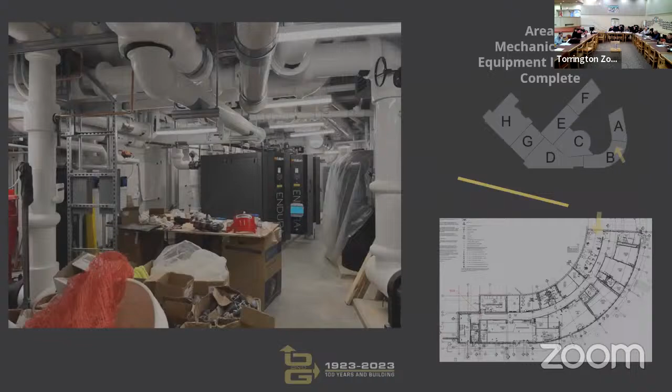Lower level. So work going on in the lower level now is the overhead electrical work. We have a little bit of mechanical that can get started in there, but primarily we have electricians doing the raceway work associated with the distribution of power, and that's going to be going on for another week or so, in the tech ed space.

In area B, fixtures are finished, paint's finished, door hardware is complete, with the exception of some sound gasketing, which we're working with the manufacturer on some tolerance discrepancies. They're basically finding a narrow gauge gasket that meets the specification requirements.

At the former loading zone areas, this work is now nearly complete. We're still waiting on a couple of components above the ceiling, but the space is clean. First floor flooring and corridor is finished. Final cleaning is now finished also on the first floor.

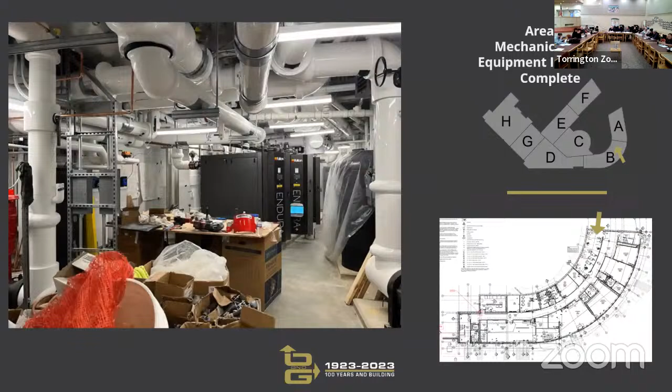Punch list has been generated. We've been really focusing on punch lists in building B and building A over the last month. We're at a point now where we're going to start that process with SLAM in a back check mode.

In area A, I mentioned a couple things. We had to finish on the exterior of the building. The sunshades are finished, exterior doors are now finished.

Above ceiling work is finished, door hardware is finished, carpet's finished, flooring's finished. We're final cleaned and generating the punch list for the administration area. SLAM is punched out now through everything through second through fourth floor. SLAM is coming out on Monday to punch list the first floor. We've done about half of that work ourselves at this time.

In the photos, you see for area B and area A some pretty pictures of the mechanical room. The only thing left to do down there is go through the checks and balances, so to speak, of the hydronic pumps. All of the equipment's been started.

We brought the commissioning agent through. We're not ready to bring him in as a final verification yet, but he's taking a look at all the equipment. We have to just final clean that space.

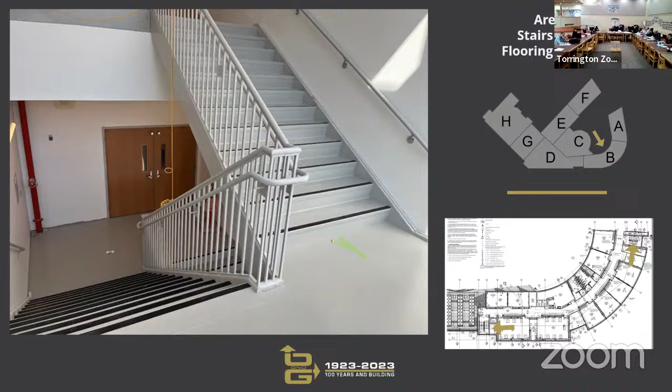The next photo represents finished flooring in the stairwells. That's now completed through all three sets of stairs in area B and area A, with the exception of the last set of risers that goes down to the lower level at area B.

In your packet, we have a shot of the overhead work going on in the construction tech class. You can also notice that the overhead coiling door has been installed in there.

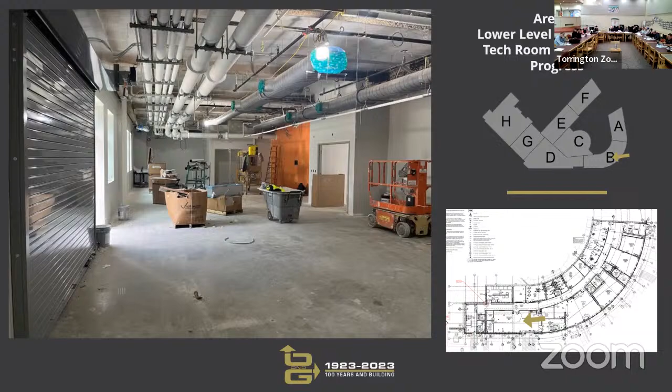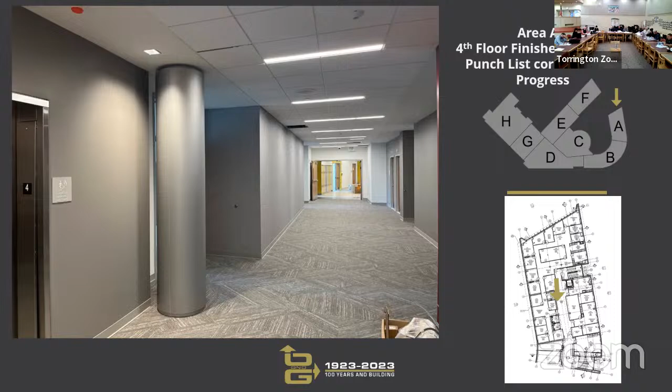We move to area A, again, more pictures of completed space, corridors complete. That's the shot at the fourth floor. That's the Board of Ed. I know some of you had the opportunity to tour the building. I find that space very comfortable, the colors and tones in the space - I think this really did a nice job. That's final clean now. I think there's a couple of little details to finish in there, but basically finished.

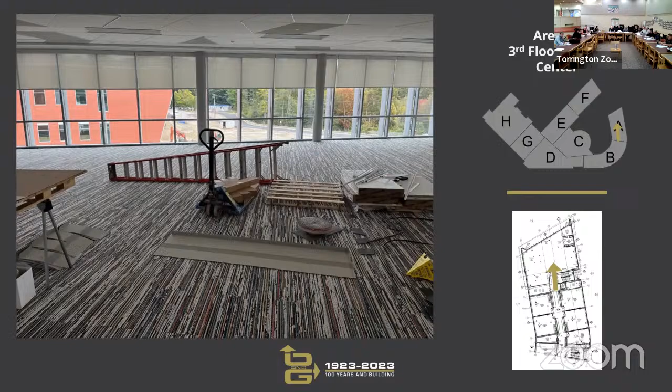This would be the media center. That was a shot taken after the flooring was finished. The product you see on the floor is the stuff they had utilized to lay down or store material until they laid the flooring. Those are big pieces of stair treads that go in the stair towers.

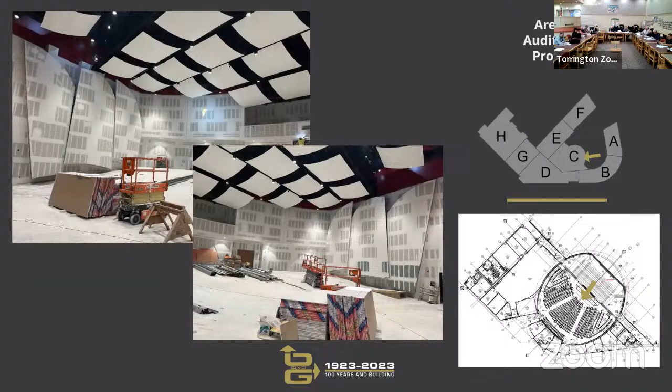Third floor, corridors finished. And we're into area C. The picture you see is the auditorium, but I'll touch on a couple of key points.

On the exterior, the projection screen wall plaster system got finished. Other mechanical related work, all the overhead work got finished. Ceiling pad installations are now complete in there. Millwork is installed. At this point the dressing rooms have countertops and things, and there's a few isolated cabinets.

Also considered in area C is the band room. We are marching through that, call it a renovation or a remodel. The backwards work is finished. They're going forward, the metal studs are installed. We have an in-wall inspection in that area tomorrow, and then we will be able to go forward with sheetrock.

My comments regarding the auditorium are that the stage curtain rigging system is installed. These guys demobilized last week on Thursday. At this time the lighting contractor's in there doing his components of the above-stage work. He's still in there, he'll be in there for probably 2 more days.

In the main room, you saw a picture of the sails. Those are at a stage now where we're installing LED light strips that go inside behind them, giving a nice glow, as each of those are large drywall sails. They all are concave, sloping at the top and sloping at the bottom.

We have another picture of area C. Oh, there's the bank room. There's the teller window. There you go. And what will be an ATM that pokes through the framing there.

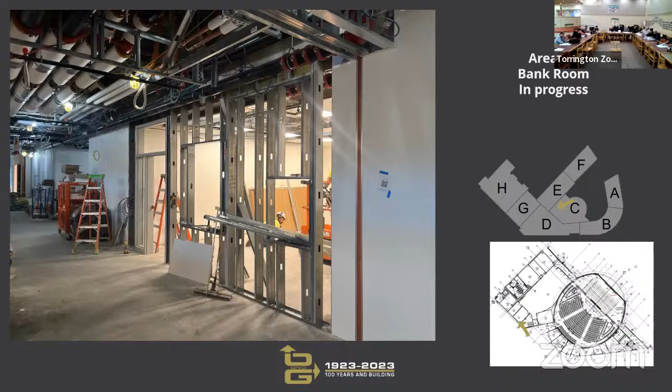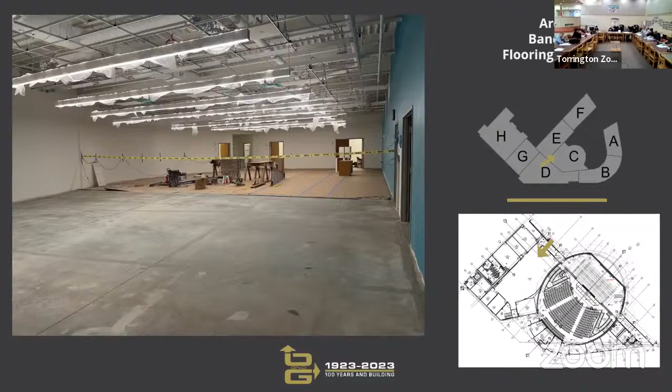I'm still in area C. The band room, which is again a very nice big room. Ceiling finishes were finished in there, and that's the flooring that was in progress a couple weeks ago. The flooring's finished now, and the millwork's actually installed in there now, and the space is pretty well finished.

Let's see, we're into area D.

Oh, he's got a pic. Oh, we let it out of the bag. Mike's got some extra pictures for us.

So in the kitchen, all the final connections are complete. I think you should look at my notes, but the kitchen equipment service connection is complete. Flooring has gone in.

Including the resinous floor in the multi-use restroom, that's outside the cafeteria, kind of adjacent to it. And the high school flooring, cafeteria flooring, is in process.

It's kind of an intricate design. For those who might have been on the tour last week, it was posted on the wall. We had to have a surveyor come in because the flooring pattern radiates away from the auditorium, in the same shape as the round auditorium facing the cafeteria. That pattern replicates as the radius grows and moves towards the exterior wall. So that was kind of complicated.

The surveyor came out to provide the control so that they could lay out all the flooring, and we're laying floor.

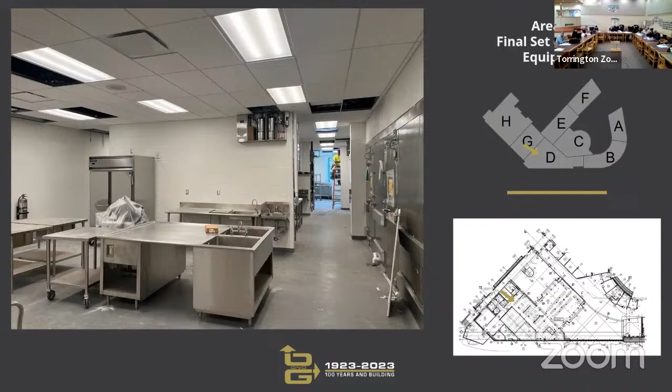We've got a couple of milestones ahead of us related to the kitchen. We do a pre-test next week, and then an actual test with the local authorities. We're testing shutdowns—gas service shuts down in the event of emergency, similar for other systems. All that has to be verified, so we're going through the last checks on that item.

On your screen is the cafeteria again before flooring started, but that's after we cleared it out so we could have it surveyed.

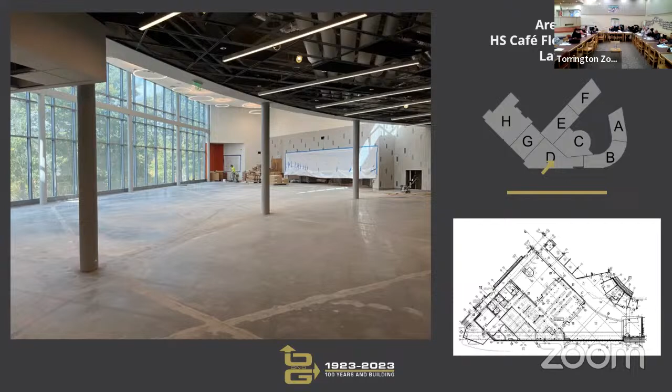I think next we go back outside. We've had the concrete contractor out to parge, as we call it, the finish on the exposed concrete, so there's a picture of some ongoing work there. Fencing has been started along that same loading dock elevation, and exterior doors are set.

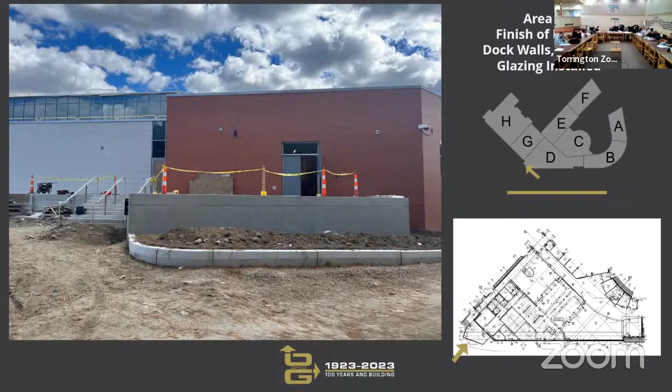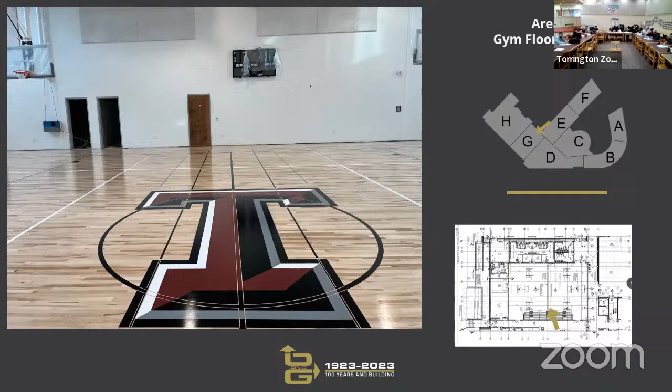We're doing some work related to the gym. There are some rooms off the gym on the Route 8 side, kind of a locker restroom, single service restroom, and we're in the process of finishing that space.

Left to do in there, we have to install radiant heat and then final balance the air system, final adjust the overhead equipment. Then that room is pretty well finished as well.

Didn't miss anything on my notes. Acoustic panels are up, you see them in there—the rubber ones, I mean all the wall pads. The wall pads are loaded and getting ready to install.

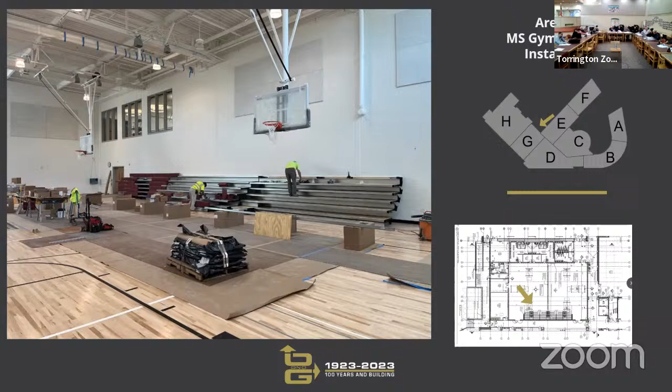Nice. Okay, so moving ahead then to the middle school. In area E, the ceiling system has gone in now throughout the building.

And the trades are doing the overhead install for radiant panels, for light fixtures, for low voltage devices, and what we call ceiling cuts, the partial tiles that go around the perimeter of the room.

Casework has barely dribbled into there. We're getting two deliveries of casework next week for that space.

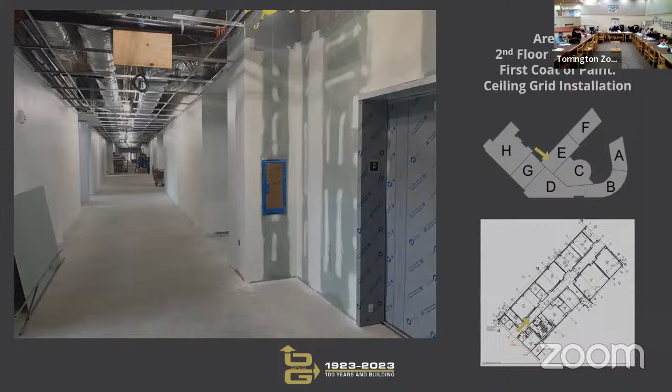From the photos, you see ongoing work. All the walls are now painted in that space, as I mentioned, when the grid has gone in.

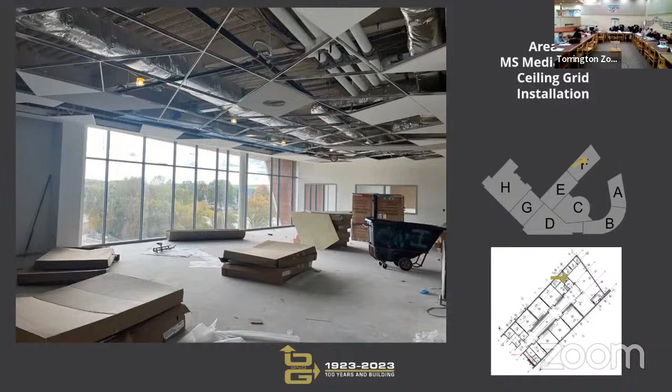So other things to mention, metal panels got finished at the main entry. We put most of the cement panels on, with the exception of some makeup pieces that they had to field verify and then order. So now you do see the facade of the building really coming together as you drive up Major Besse Drive.

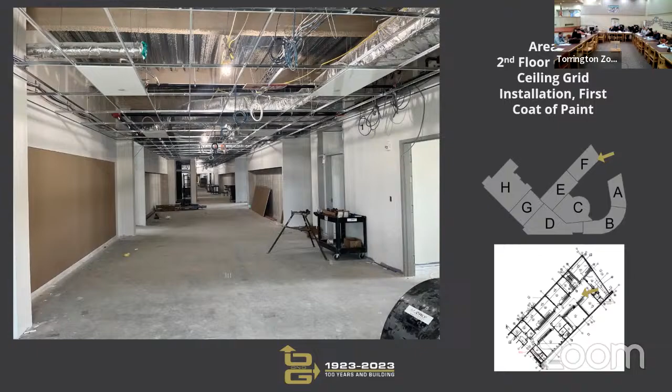What else do we have? There's that facade, and then you can see the guy pouring some sidewalks—a lot of pictures of sidewalks, a lot of sidewalk, a lot of sidewalks now installed.

So yeah, exterior work-wise, the front—finishing off all the sidewalks, finishing off the curbs. We have topsoil, of course. Plants came on Tuesday of last week, so plant installation has begun. The topsoil is now seeded as well, in addition to the building facade work.

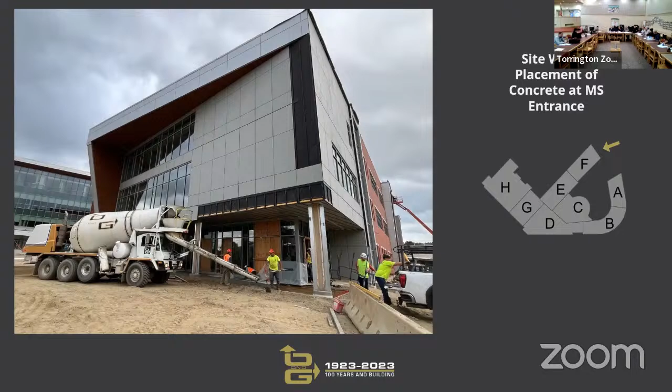And what else do we have to share? Just site work, showing the exterior driveway. You can see a little bit of topsoil on the left, and the large 2-inch riverstone that generally blankets a lot of areas around the generator.

The play equipment arrived some time ago. We call this at the time of this photo. Since then, we've now put in the fencing around that. Yesterday and today, they installed the poured synthetic rubber surface. There's 1 3/4 inch thick rubber that goes down over that play area for anyone that falls off a piece of play equipment.

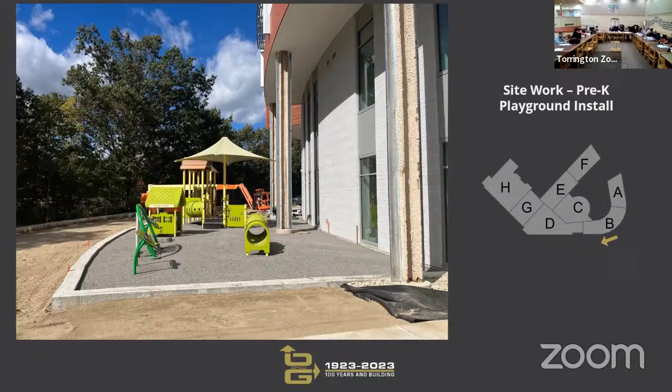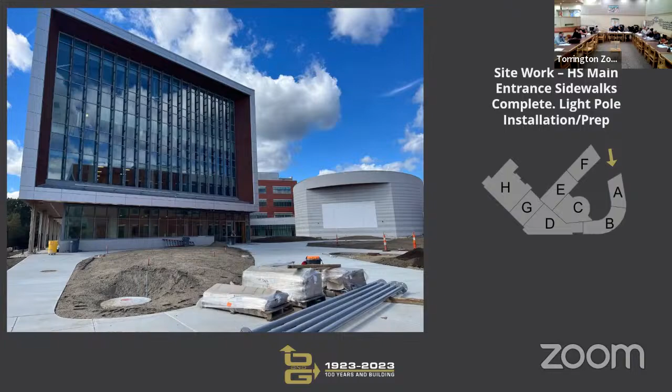More pictures of site work. I think the best way to see the site work is when we're looking at the drone shots. In the picture, you see some equipment still packaged, like benches and other pieces of site improvement work. And the light poles, they've been installing light poles for about 2 weeks and pulling wire. We will be able to energize the lighting along Major Besse Drive by next Friday. A little dark out there currently.

Oh, we got a picture. We got today's pictures. With that, Mike, you want to speak to them? Yeah, this is looking at the big courtyard in the high school. A lot of the plantings are in place. They had hydroseeded the courtyard, as well as most of the areas where topsoil was down. Final grading was complete. Trees are in.

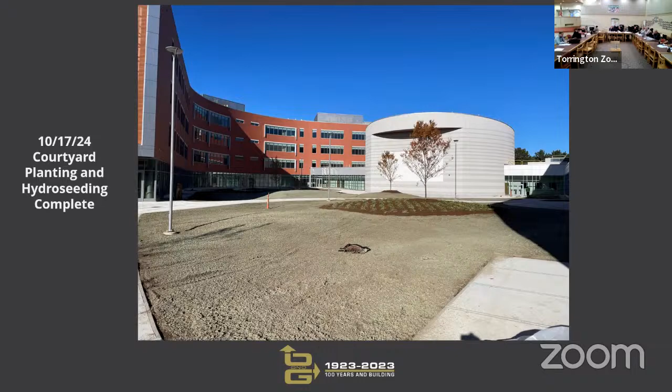Got some of the light poles in there too. Yeah.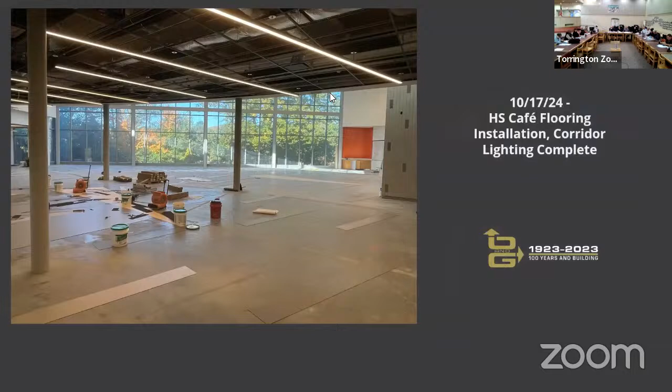Other milestones to mention on the equipment side: hot water heaters - I call them hot water boilers, but both the water heaters and the boilers have been energized. We did go through the fire protection booster pump, maybe mentioned previously, but this month we energized the domestic water booster pumps. And now we have internet live in the building through all of the occupied area.

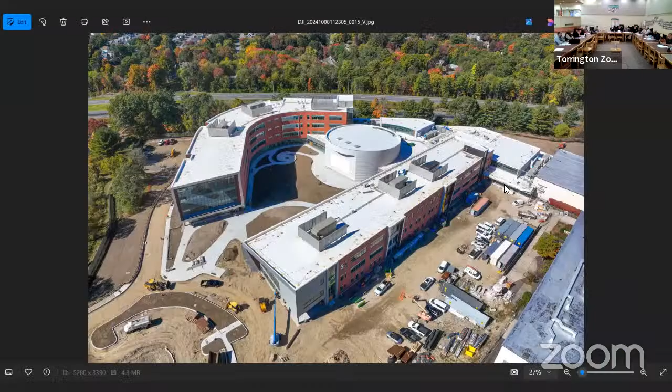Total Communications, the technology contractor hired directly by the new group, has finished their installation, bringing internet into the building and livening up the switches that drive communication within the building. That's allowed the fire alarm and security systems contractors to finish programming and tie their information into the internet. Today, Total Communications was on property.

They're doing the background work—Rachel would know much better than I—that allows the new school to become a hub as part of your overall townwide or citywide network.

Mike found a picture. In that picture, probably 4 days ago, the only chunk of concrete that's not there is the one right in front of the middle school. We've placed twice since then. I think there's only one more placement, possibly two more placements.

The big milestones going forward for us—we've established our paving date. It's really predicated not so much on the work around the building, but more driven by the date we want to pave the Winthrop Road parking area at the same time. We're fine grading the week of 11/11, and paving the week of 11/18.

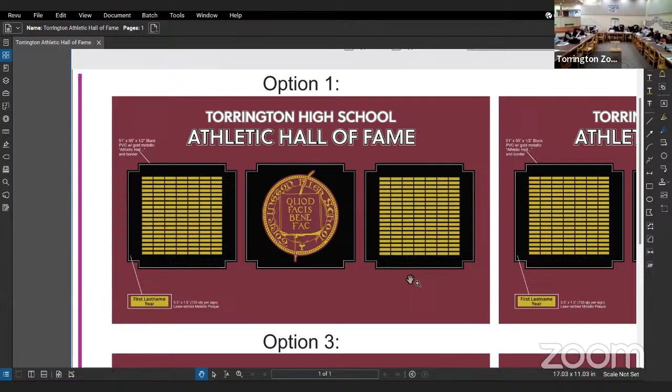So as a matter of design, does anybody have a preference over one over the other? I like 4. I like 4. Everybody seems to like 4. I think you guys are right, easiest to read. 4, everybody good with 4? I agree. So I will report back to them. Kemp, if you would just have your girls work with Riley to make sure the materials are something we can all be proud of. Yes, we'll take care of that. And I agree, I think 4 is the right choice. Okay, cool, 4 it is.

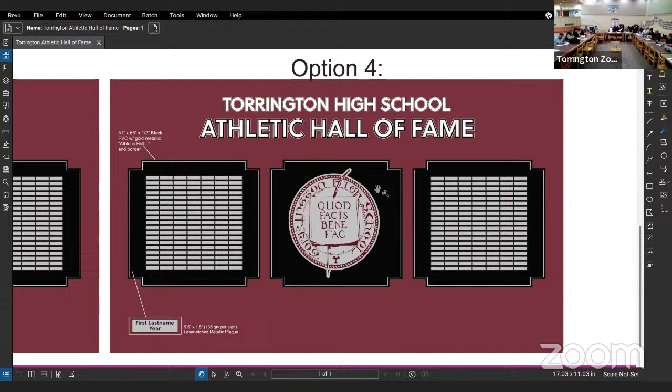3 is good, but hard to see. Yeah. All right, 4 it is. Thank you, everyone.

Next item is the application and certificate of payment for $3,736,495. Could I have a motion to approve? Pat, second, Doug. Fiona, were you writing that down? Discussion? All in favor, aye. Opposed?

Okay, Dan, you're up. We on the PCOs? CCOs, okay. So your packet contains a substantial number of PCOs processed over the course of the month. I can provide a brief description of each. I'll start with PCO 307R1.

This represented a $2,400 increase to the GMP, representing additional EPO buttons, emergency power off buttons, for the gas equipment, just generally overlooked in the design of the building. We had to add some push buttons to kill power.

The next item is a draw from the CM contingency. We had carried this cost previously, we just had to ink it in the due process here. In my assignment of the scope of work for caulking at millwork, I picked up millwork against adjacent walls, but not between the sills and the windows. So we had the caulking contractor come through and do a nice job on that work. So a CM contingency draw for that.